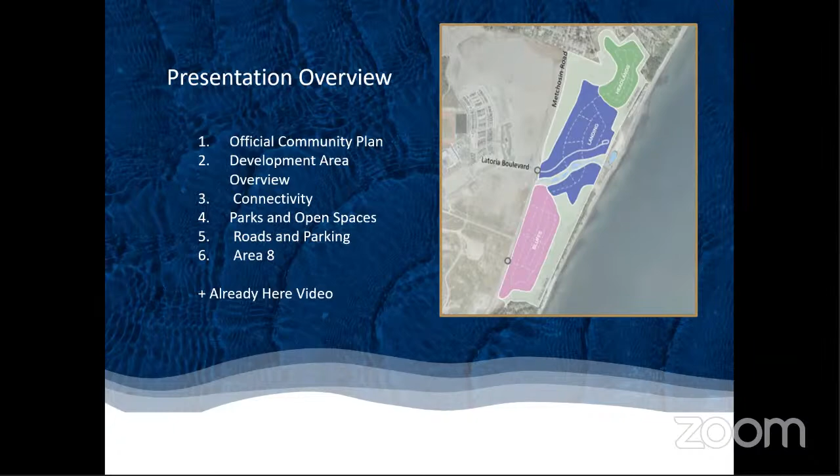Royal Beach has been identified as one of two primary centers in the city of Colwood designated for cultural, civic, economic, and public life. As you can see from this map from the Royal Bay Area Plan, the proposed development is not that different from what was envisioned, and some components like the amount of parks and open space and where they are located have remained largely unchanged.

This is the Royal Beach portion of the Royal Bay Area Plan. I've highlighted Latoria Boulevard and Ryder Hesjedal Way for orientation. Shortly, I'll provide a high-level overview of each development area and their purpose, as well as precedents for the uses and built form for each. A more detailed overview of each development area will take place at the time of public hearing.

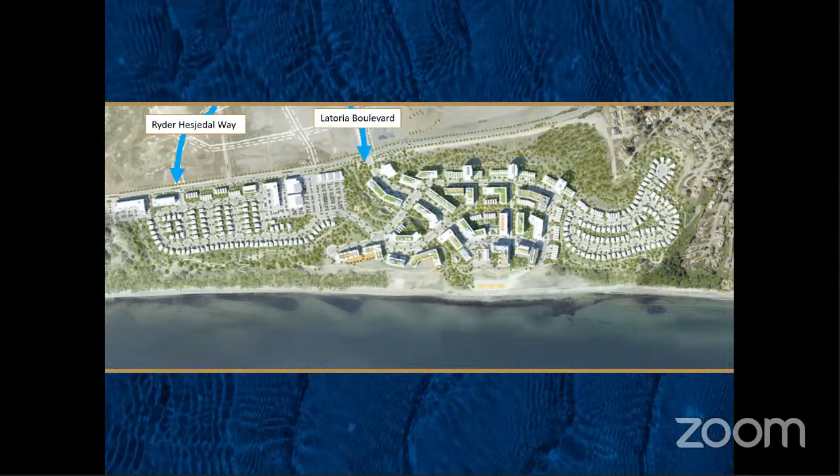The current OCP and land use amendments look to expand the Seaside Village land use designation and add additional density to the lands. The Seaside Village designation has been extended south along Metchosin Road to respond to the expansion of the designation at Latoria South and create the Metchosin Road corridor, as this is the only part of Royal Beach that can immediately respond to development across the street.

The Seaside Village designation has also been extended south in the Landing neighborhood to allow for greater flexibility in the future around land uses such as a future passenger ferry terminal. The proposal is substantially aligned with the Royal Bay Area Plan, which identified approximately 50 acres of parkland dedication, predominantly in the Bluffs and the Headlands neighborhoods.

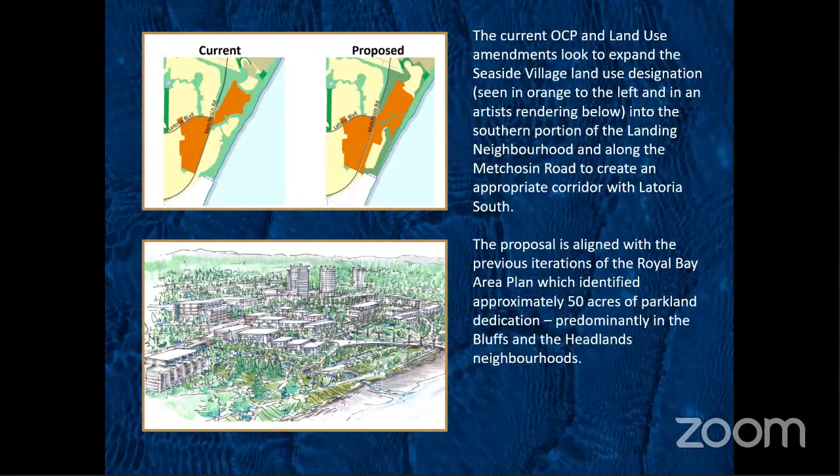This conceptual rendering shows what a built-out Royal Beach could look like under the proposed zoning amendment. For reference, the brown tent currently up at Royal Beach is just above the lowest pond. That pond is located on the far side of the volleyball courts on this rendering. This helps demonstrate the substantial space between the foreshore and the waterfront property line at Royal Beach.

At this time, I won't go through how the proposed landing design guidelines apply to each area, but I will note that they do apply to all the development areas in Royal Beach except for Area 3 and Area 7.

Each area will be highlighted in these next slides with the blue outline, as you can see in the top left of the rendering. Area 1, Bluffs, multifamily, and mixed use.

This area is where the Seaside Village designation has been expanded to create the Metchosin Road corridor and synergy between Latoria South and Royal Beach. Predominantly standalone multifamily buildings are planned, ideally with a mixed use component. This is also where the extension of Ryder Hesjedal Way will enter Royal Beach. Standalone non-residential is not planned for this development area.

Area 2, the Bluffs Commons. This area is where larger format retail uses can occur at Royal Beach. Areas 1 and 2 are the areas where there is a maximum of 6,600 square meters of non-residential uses permitted. Seacliff Properties has withdrawn the request to remove this maximum.

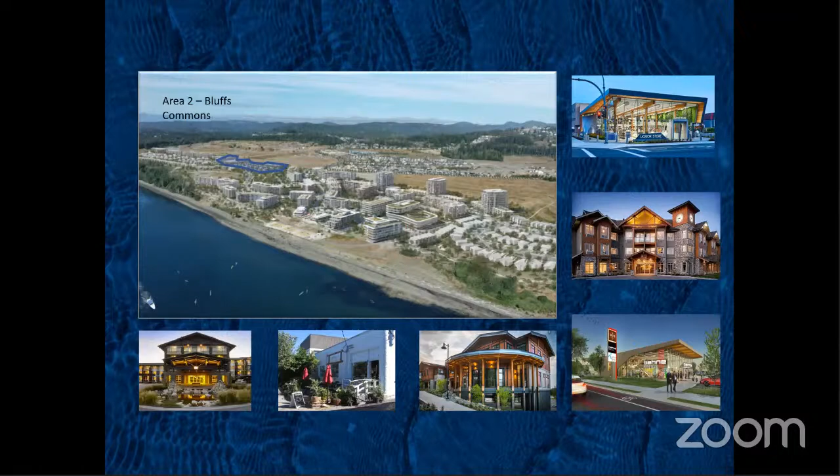Area 3, the Bluffs neighborhood residential. This area is predominantly 1 and 2 family homes, as well as some multifamily. A significant portion of this development area is proposed parkland. For information, there's about 95 linear meters between the high water mark of the Bluffs and the geotechnical build line in this area.

Area 4, the Shores at the Landing. This area is where mixed use and multifamily development is proposed along with non-residential uses. This is the development area where a future passenger ferry terminal could be developed, as the roughly 5-story grade change here could accommodate a larger building while having minimal impacts on the upland sightlines. No buildings taller than 6 stories can be developed in this area.

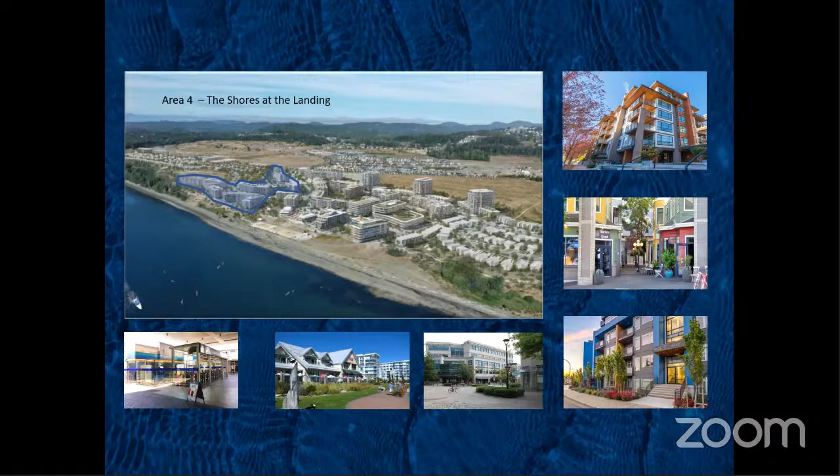Area 5, the Landing Mixed-Use Core. This area is where mixed-use development will occur, along with some standalone multifamily in the townhouse or apartment typology.

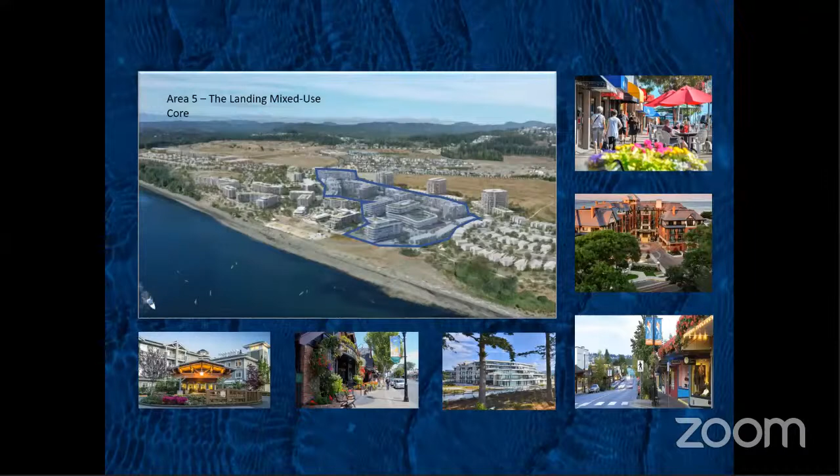Area 6, the Landing Mid-Rise. This area is where building heights can be up to 12 stories due to the siting along the base of the steep Metchosin Road hill. This will be a mixed-use area where the podium style of building could be featured. For context, only one of the 3 proposed 12-story buildings will be seen as about 3 stories from Metchosin Road. Another will look like a 1-story building, and one will be completely out of sight from Metchosin Road.

Area 7, the Headlands neighborhood. This neighborhood is a proposed single-family neighborhood with some transitional multifamily in the form of townhouses. This area will be where pedestrians could leave Royal Beach and travel north on the extension of the multi-use path towards Ocean Boulevard.

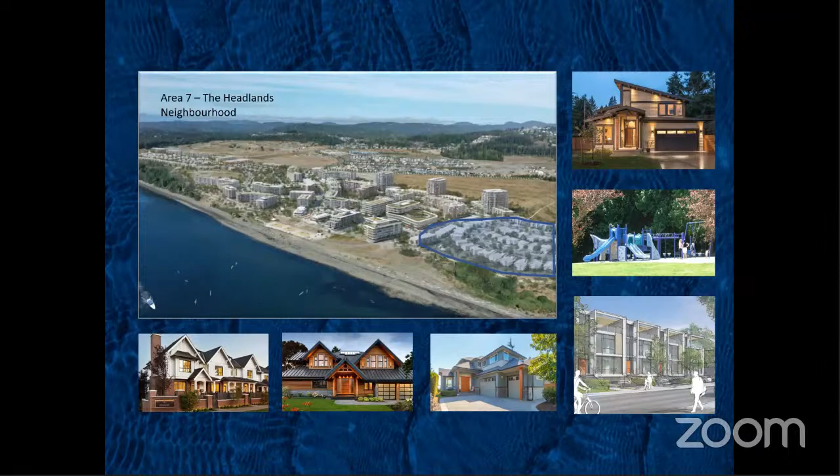Area 8, the Plaza at Royal Beach. This is the heart of Royal Beach, and this is the area in which all of Royal Bay and the Greater Victoria region will be connected to the waterfront and beach. I will be going through this area in detail later on in the presentation.

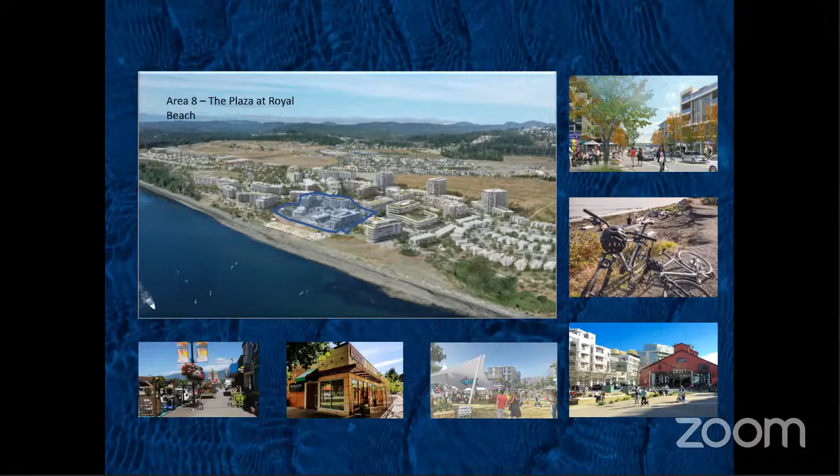So how are the development areas, parkland, and all of Royal Bay going to be connected at Royal Beach? Well, in a variety of ways. The first is most obvious: physically, at the entrance to the Creekside Trail at Metchosin Road, and the extensions of both Latoria Boulevard and Ryder Hesjedal Way into the site.

The second is visually. Royal Beach will look like the greater community of Royal Bay by using the same light standards, incorporating public art, the same style of street furnishings, boulevard treatments, and most importantly, with the views from public spaces, including Metchosin Road.

Finally, Royal Beach will be mentally and emotionally connected to the existing community. We understand that the residents of Colwood and beyond already have a strong attachment to the spectacular waterfront and naturalized areas at Royal Beach. We get that the lands are already part of the greater region and Royal Bay area, and want to emphasize and make that experience better by strengthening that sense of place.

This is the overall connectivity map showing the entire Royal Bay area of Colwood. On this map, Metchosin Road is detailed in purple, and so is the extension of Latoria Boulevard into Royal Beach. These are considered arterial roads. The other road connectivity point

is the extension of Ryder Hesjedal Way into Royal Beach as a collector road, shown in green. Royal Beach is also connected to Latoria South and lands to the north via two multi-use paths. One begins at the park space at the Metchosin Road Latoria Boulevard intersection and travels down Royal Beach, adjacent to the existing stormwater channel, to tie into the second multi-use path, which runs parallel to the waterfront for the majority of the Royal Beach foreshore. That waterfront multi-use pathway will connect over the city lands to the north towards Ocean Boulevard for future City of Colwood waterfront connectivity.

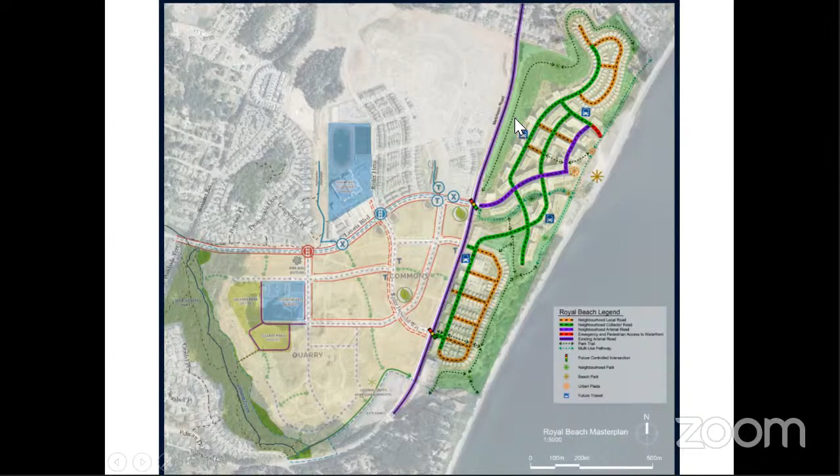The amount and quality of the parks and open spaces at Royal Beach is what makes us a vibrant, connected to nature and world-class community. The total parkland dedication is approximately 50 acres in area, designed with a softscape, naturalized approach for both parks and the trail network. The waterfront multi-use pathways will act as a main spine and connect people to lands beyond to the north and up into Royal Bay with the Creekside Trail.

The foreshore lease lots, identified as a city-initiated piece of land to rezone for future marine uses, is the perfect area for passive recreation such as volleyball and community gatherings. The parks at Royal Beach are plentiful with 10 special places that include a range of things from playgrounds to viewpoints, acting as the pearls on the trail network necklace.

Shouldn't write my own tongue twisters into my scripts.

Please note that the request for community amenity credit for the temporary park at Royal Beach was formally withdrawn on October 14th. Seacliff Properties Senior Asset Manager Georgia is on the line and can speak to that in more detail during agenda item 5.3.

We know that Royal Beach is already an important destination for folks to connect with nature, walk the beach, and recreate. The intention of the parks plan is to enhance the things that are already here and provide the supporting amenities to make Royal Beach a world-class community and destination for not only Greater Victoria, but all of Vancouver Island.

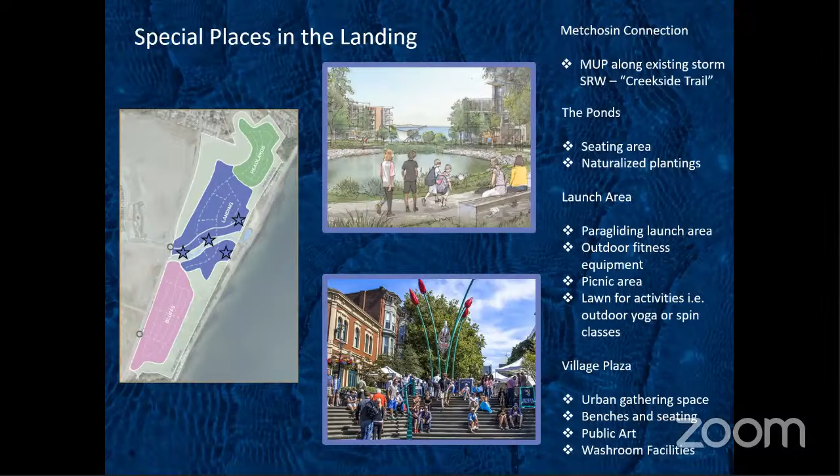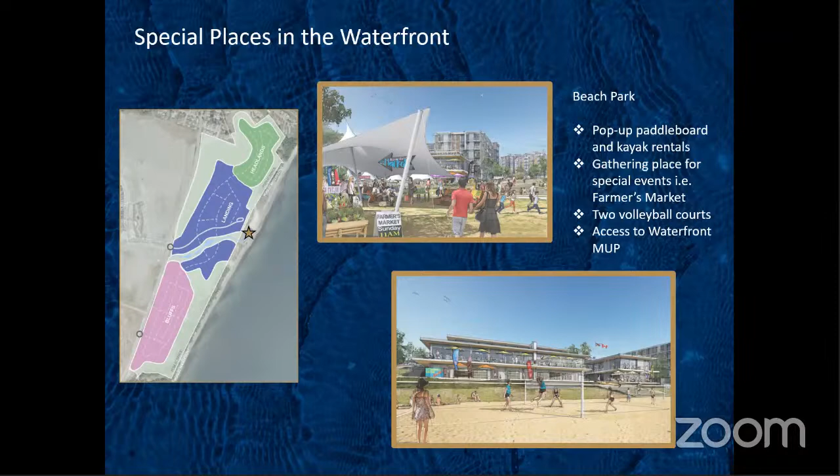In the Headlands, we see the last 2 special places, the Metchosin Bank Lookout, which will be a viewpoint with a seating area, and the Headlands Park, which will be a viewpoint, seating area, and have a small playground.

Note the ground floor of any building within 18 meters of the waterfront property line cannot have any office uses, to encourage an active and vibrant waterfront area.

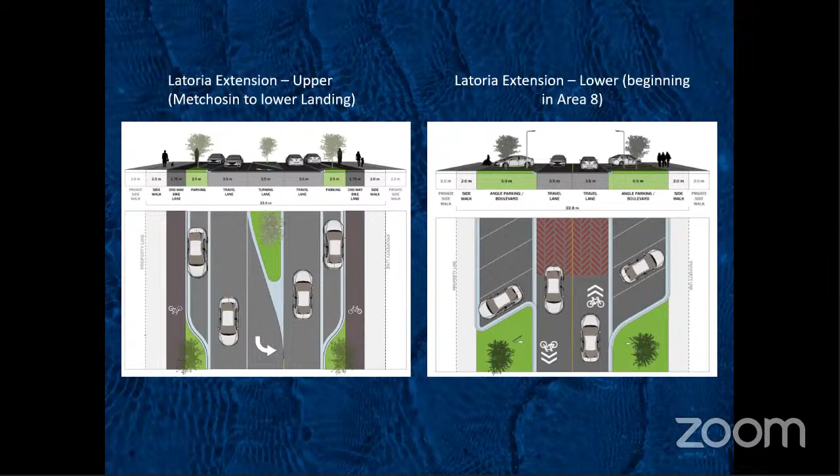The neighborhood local and collector roads echo those from Latoria South in design. All internal roads at Royal Beach will include on-street parking where achievable. For collector roads, one-way bike lanes will be provided on either side of the road. As Royal Beach is quite sloped, the grade will ultimately determine how each portion of road will need to be configured.

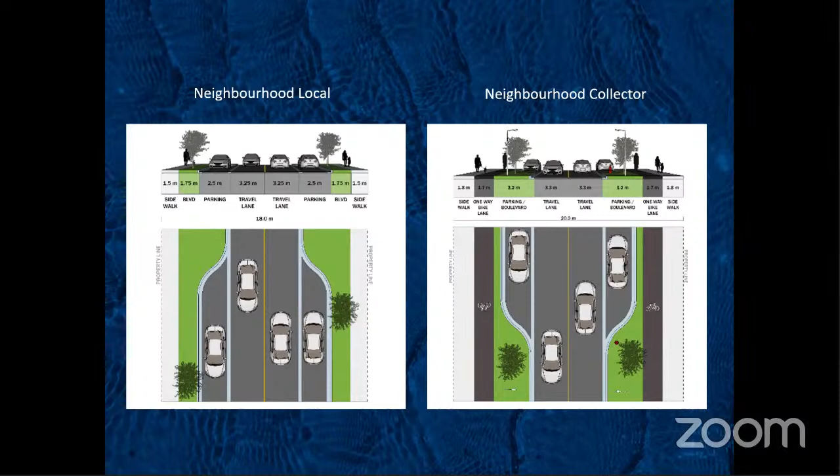Area 8 is now approximately 3 hectares in size, includes 4-meter wide sidewalks and angled parking on either side of the road, has 3 statutory right-of-ways to guarantee public access to the waterfront, and a limit on size for ground floor non-residential uses, excluding brew houses and eating and drinking establishments, because nobody wants a small pub.

This is also the area where no office uses are permitted within 18 meters of the waterfront property line. The foreshore length of Area 8 is 205 meters.

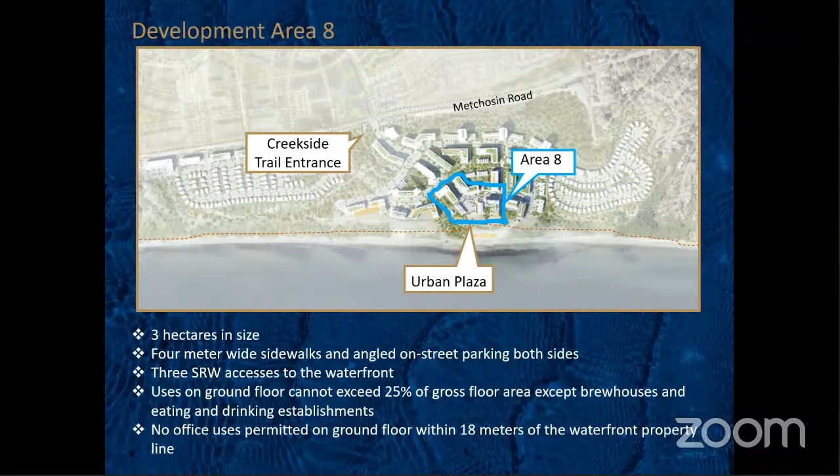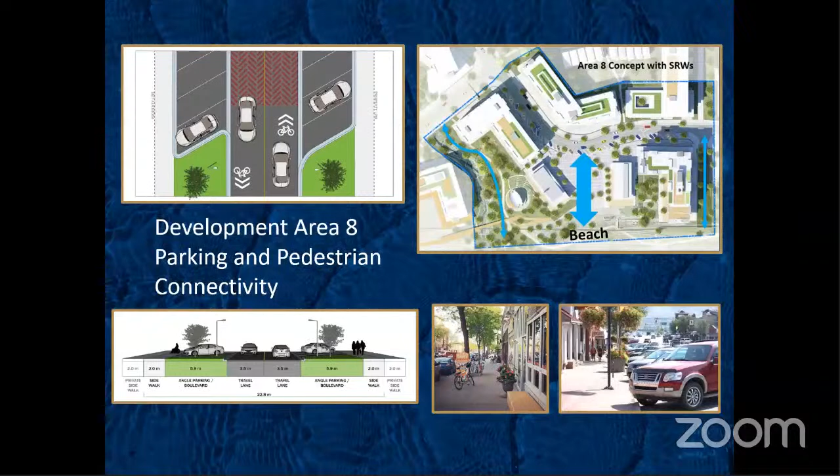This artist's rendering of the plaza and lower Latoria Boulevard demonstrates how all of these components may look and feel. The buildings step back from the waterfront, the boulevard is ample, a wide plaza frames the City of Victoria view, with the buildings directly adjacent spilling activity out into the public space.

Overall, the area has a human scale with a high quality urban design. This is planned to be a sticky place, the heart of the Landing neighborhood, and hopefully Royal Bay in general.

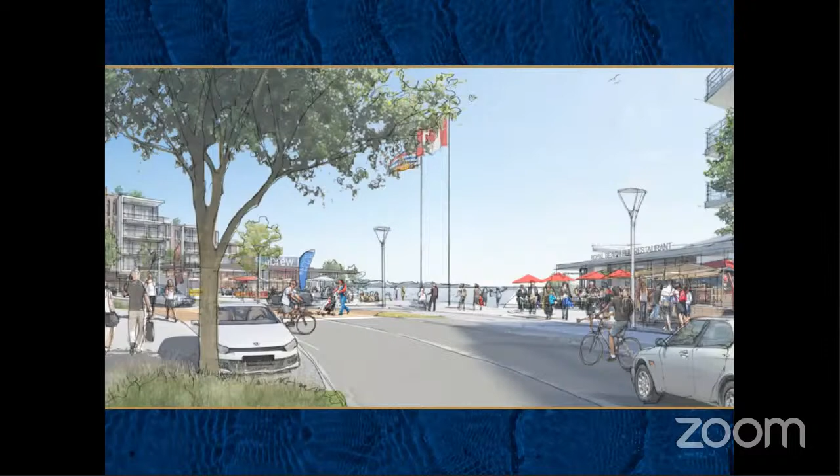That concludes our presentation. Thank you. Seacliff Properties and the development team look forward to the public hearing and working with the City of Colwood to make this world-class community a reality.

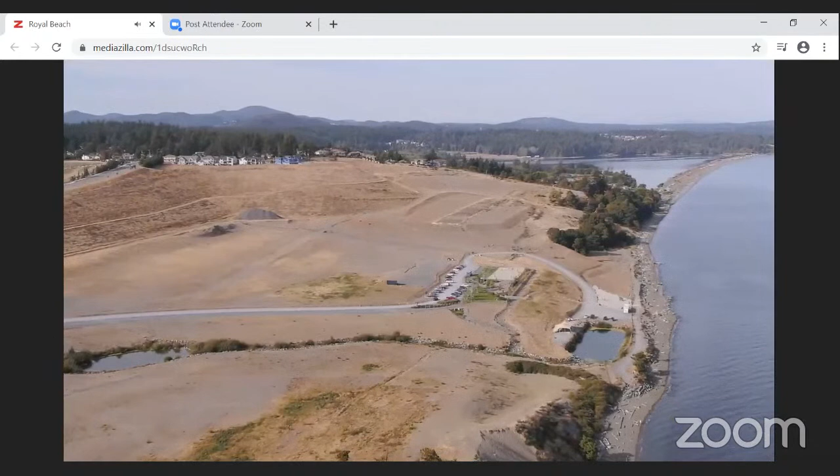Royal Beach. The community is already here. Royal Beach is already a destination for recreation, tourism, and community gathering. The new Seaside Village will offer even more amenities, parks, and open spaces, with the promise to be a vibrant, flourishing...

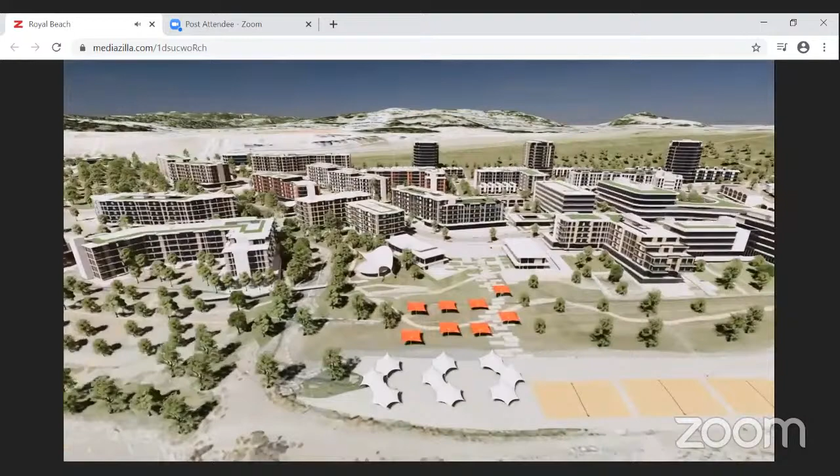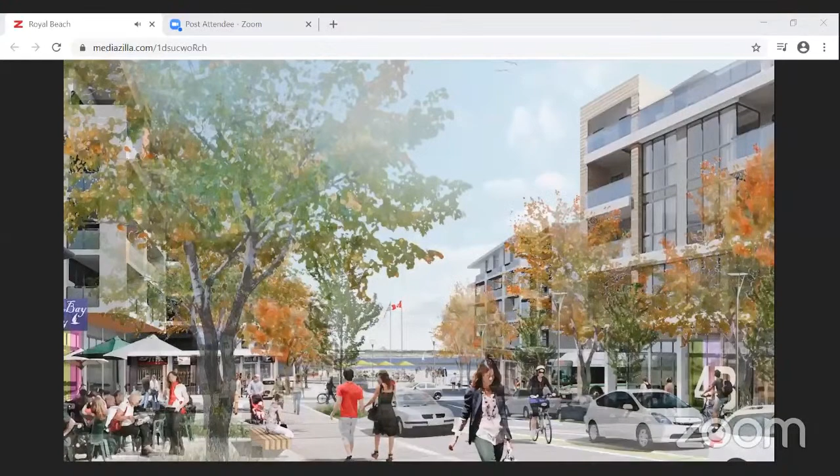Bike lanes and angled parking in the heart of the landing neighborhood. This road will take residents where they want to go. Trails will be another important point of connection to Royal Beach. The Creekside Trail will be a multi-use pathway, creating a wide open space that leads people down to the waterfront. Other trails will connect to 10 special places and parks sidewalks outlined in the Royal Beach Parks plan, but they'll also connect to other trails in Colwood, such as Ocean Boulevard and the Meadow Park Greenway.

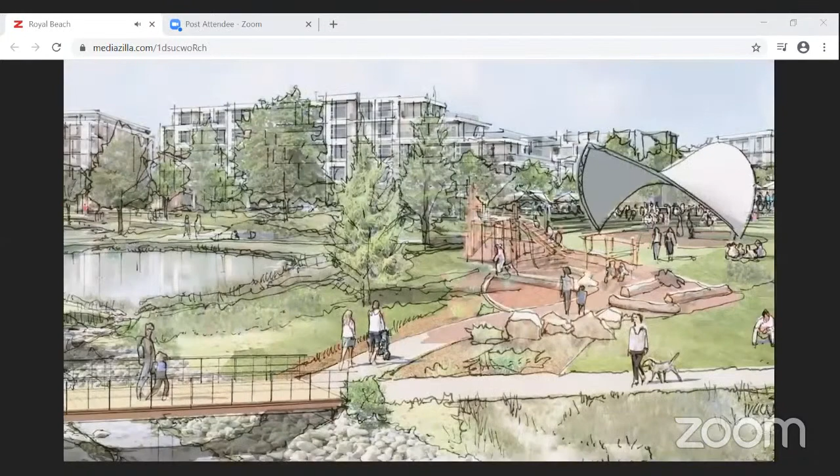When people arrive at Royal Beach, they'll find local shops, restaurants, parks, and residential spaces that are at the heart of Colwood. Area 8 and the landing neighborhood in general will be the hub of all of Royal Bay, stitching together the surrounding neighborhoods and connecting them to the waterfront and lands beyond, as envisioned in the Colwood official community plan. With its world-class waterfront and incredible public amenities, this area will also be a destination for the whole capital region and visitors to the island.

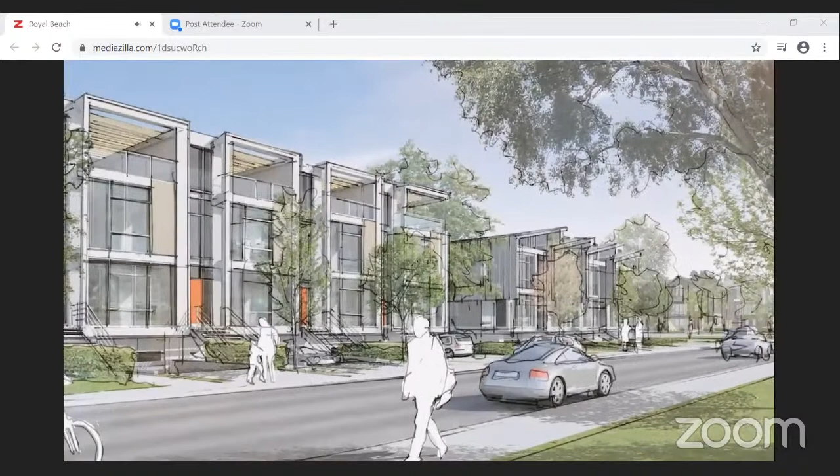Royal Beach's design will echo the surrounding community to make a strong visual connection. Light posts and boulevard planting currently seen in Royal Bay will be continued down into Royal Beach. The Headlands neighborhood is designed to blend well with the existing single-family development to the north. And finally, the mixed-use commercial space at the top of the Bluffs will create cohesion on Metchosin Road and integrate well with the commercial area across the way in Latoria South.

So how do we know that Royal Beach will become a community, citywide, and regional destination? Because it already is. This summer, Royal Beach hosted a wide variety of events and welcomed visitors, vendors, and participants from all over the Lower Island. More than 4,000 people visited Royal Beach this summer for scheduled events and pop-ups, in addition to the countless community members who frequent the area for its playground and the waterfront.

The events highlighted how the Royal Beach development will enhance this already important spot in our community and provide valuable connections. The Sunset Markets, for example, brought vendors from Metchosin, Victoria, and even Saanich and offered insight into future commercial opportunities along the High Street, Area 8, and throughout Royal Beach.

Spinco by the Sea provided an opportunity for a local business to welcome riders from all corners of Greater Victoria and the West Shore. And it's easy to imagine this kind of activity in a permanent structure as the development takes shape.

Paddle sports pop-ups connected people directly to the water. It's clear that Royal Beach will be a destination defined by its oceanfront location, and water rentals will continue as the new community develops.

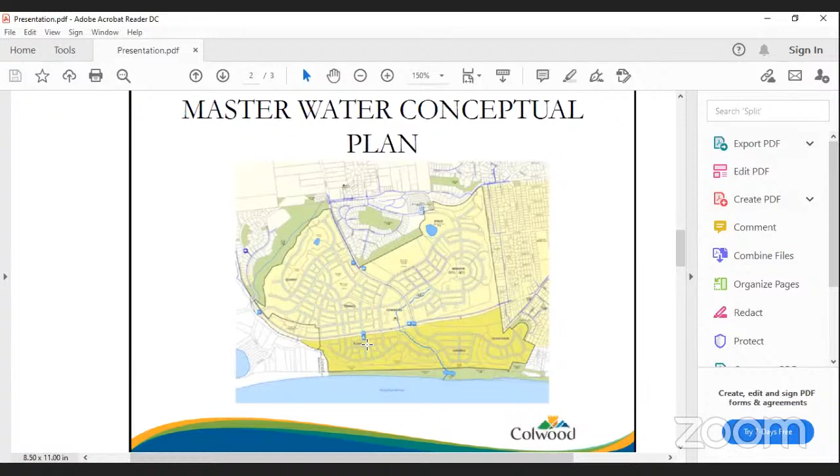With the higher density, On Point has calculated that there is adequate water supply and water pressures to service this development through 2 pressure reducing valve stations. If the development needs additional water supply, they will be able to connect directly into the supply main on Metchosin Road. At each stage of the development, we will be making sure that there is adequate domestic flows and fire protection flows for each stage.

For sanitary sewer servicing, all of the servicing is expected to be by gravity flow to 1 lift station at the low point of the development. There were some questions about whether it might make sense to abandon the large lift station on Metchosin Road and combine it with this lift station for 1 large lift station.

On Point did some very high level comparison of operating costs to do this, and they found that it would take a lot more electricity to run just 1 large lift station at the lower point rather than having 2 separate lift stations. They also did not take into account the fact that there is an existing smaller lift station on Metchosin Road. So if the large lift station is relocated into Royal Beach, the smaller lift station would have to be upgraded as well, all the way up to Latoria Boulevard.

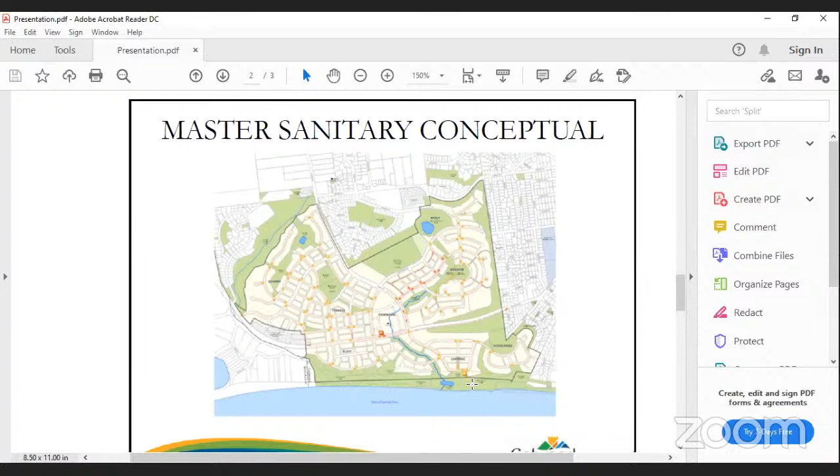The Royal Beach area was calculated to have an allocation of 21.2 liters per second for sewage flows. On Point has calculated that the maximum sewage flow due to increased density may be up to around 65 liters per second. So the developer will need to measure the flows at each stage in development, and when they do exceed the 21.2 liters per second allocation, they will have to start paying enhancement fees.

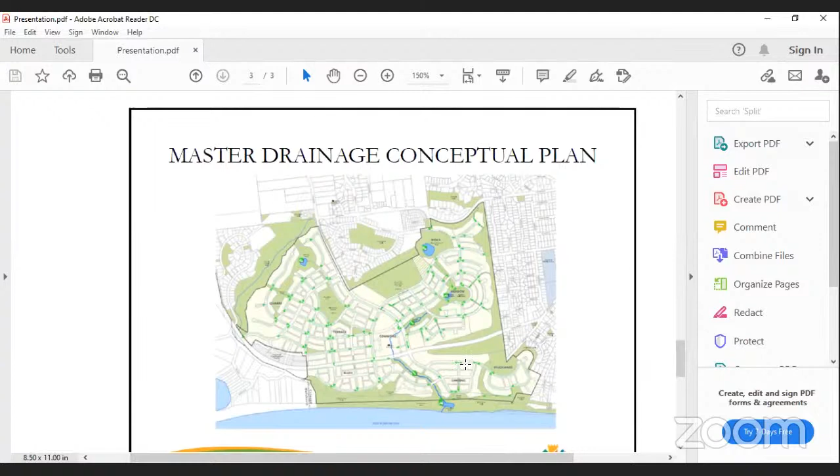I don't have slides, but for BC Hydro, they don't have quite the electrical capacity needed for this development, so the developer will have to work with them to ensure there is enough. For telecommunications and Fortis BC, those utilities have confirmed that they have adequate capacity to service the Royal Beach development. So the recommendation is that this report titled Royal Beach Servicing be received.

Are there any questions? Thank you very much. I think I have a couple of hands up. Probably what I'd like to do is just give everybody a chance to comment on each of these reports in turn, and then after everybody's had one chance, I'll look for a motion or a recommendation. As I said, we have Helen and others here ready to answer any questions.

So if I could start with Mayor Martin. Thank you, Chair. I have to ask the question because it just needs to be asked, and I just need to hear the answer just once. We are confident where we are placing the lift station that the 100-year, whatever it is, that we will not need to move that lift station.

I do not want to be in a similar situation to what we are at the bottom of Ocean Boulevard with the lift station there. So do we have complete confidence that that is the right place to be putting that lift station, and it shouldn't cause any issues where it would need to be moved.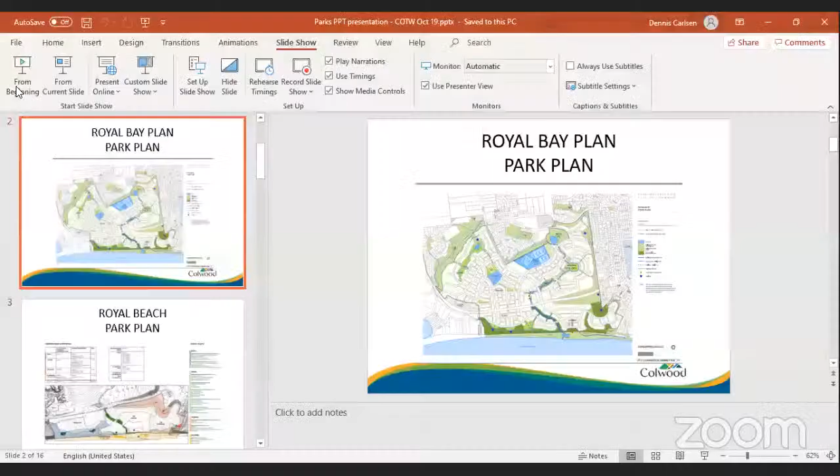So this presentation is regarding the parks terms of reference. Some of the things I'll mention here have already been covered by the applicant, so I'll attempt to be brief. This Parks Terms of Reference came out of a council resolution on February 24th that instructed that, as part of the development agreement, we, together with the applicant, develop a terms of reference to be presented for your consideration and a recommendation onto council.

It also included a recommendation that the first phase of development would include the waterfront park and open space in the landing, and that it would also include public parking as well as a surface trail system parallel to the waterfront.

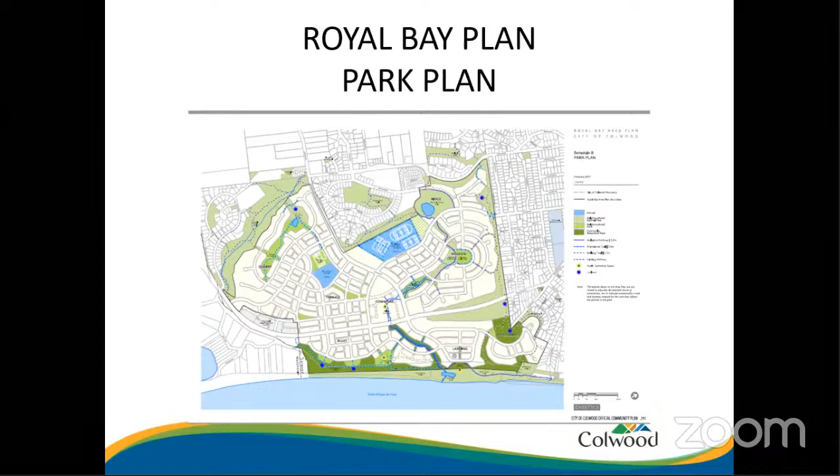Just for context, the Royal Bay plan, which is in the OCP, did establish a parks plan, which, if it looks familiar, is very much reflected by the parks plan being proposed by the applicant. In the opinion of staff, this parks concept is in keeping with that overall Royal Bay Parks plan. As has been noted, the foreshore is not part of the subject property. It is Crown land, partly held as a foreshore lease held by Seacliff Properties.

For some additional context, which I think was presented to committee or council a few weeks ago, the draft Colwood Parks Plan identified that the current inventory of parks in Colwood was approximately 1.2 hectares per thousand. As a point of comparison, what the applicant is proposing is significantly more than that, at about 2.7 hectares per thousand - again, comparing municipal parkland, which includes everything: neighborhood parks, parkettes, everything. The current inventory is about 5.3 hectares per thousand, and the proposal for Royal Beach is about 3.1.

Moving on, and Aaron will talk about this, the road standards, more in his presentation. But basically, what I want to do here is indicate that in addition to the parks plan and the trail network that connects all these, there's also additional pathways that will form part of the road network. So there will be multiple connections between the various areas in the site and also to areas outside of the site.

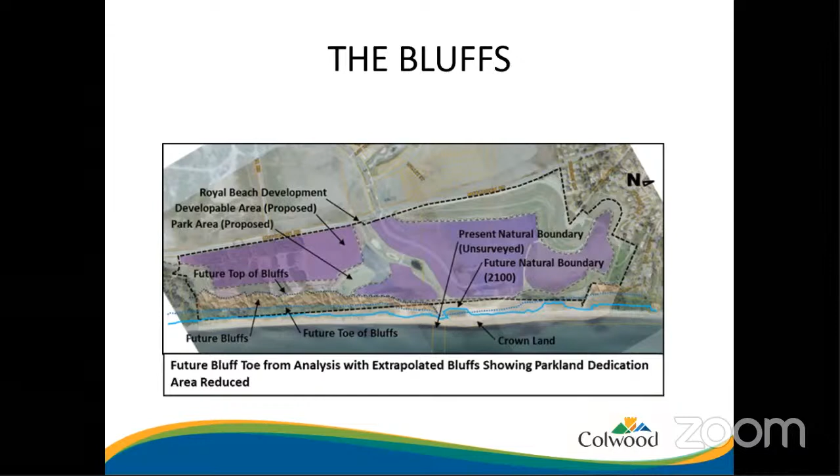Now, in discussions with the applicant and in response to council's concern about taking this on as parkland and what that means in terms of risk and liability, the geotech report that also accompanied the report in December did show, as a way of holding back the contamination, that there would be a wall constructed, which you can see on this diagram, essentially in this area here. And in discussions with the applicant, we have suggested that as a condition of the development agreement, there will be no subdivision within Area 3, which is essentially this whole area in behind the structure, until the works have been identified and constructed. So we're hoping that that will provide council some assurances that these issues will be dealt with to their satisfaction.

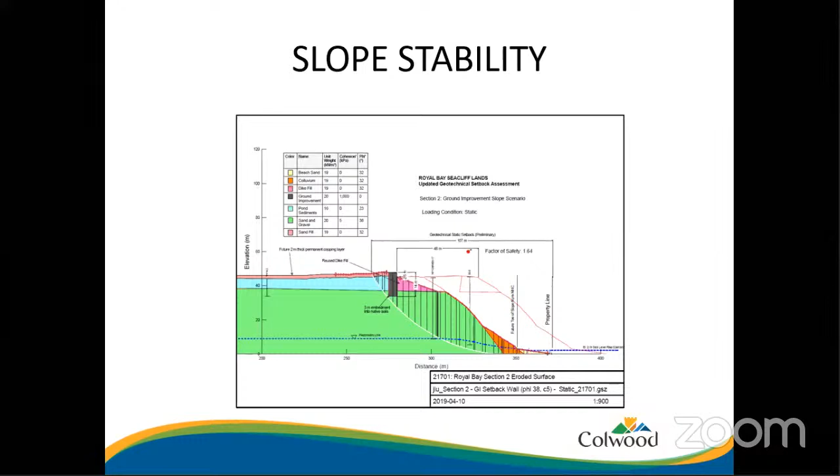Turning to the landing, there also are some things that staff want to point out here, largely in response to concerns expressed by council about wanting to have a better idea of what was proposed down there. This is similar to the image that you saw in the presentation at the beginning from Tanisha. But this image, along with accompanying text, will be included in the sub-area plan, and its intention is to make it much clearer where the views and the access and the open space will be provided adjacent to the water.

As you can see here, there will be a large plaza for the public. There will be a pathway that will work its way down the improved storm channel area, and an additional connection from the street through to the water. So multiple points of connecting through a variety of ways, as well as the water, all of which is the intention of connecting to the waterfront pathway. You will also see when Aaron provides his report that the street will provide angled parking to provide hopefully sufficient public parking for access for people wanting to take advantage of the waterfront pathway.

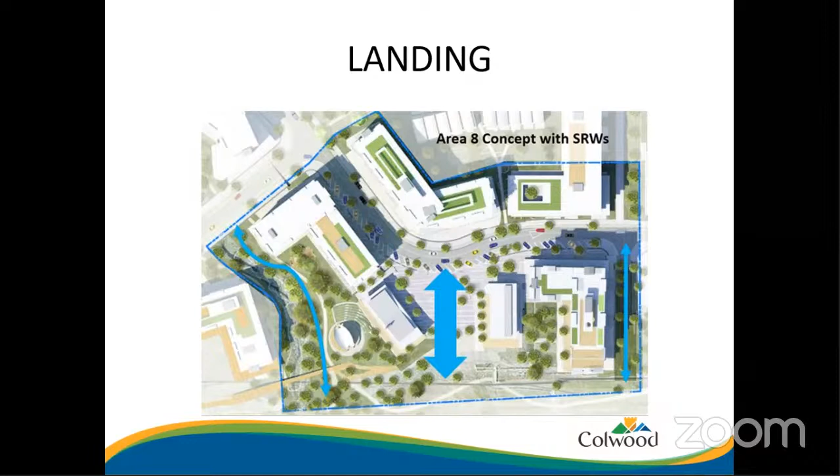In terms of the waterfront itself, the foreshore has been mentioned in discussions. Council at its meeting of August 31st directed staff to prepare a bylaw to amend the zoning on the foreshore leases, which are currently zoned A1, basically a rural residential zone, with the intention that we would include zones that would allow the applicant to animate the foreshore with various types of uses, be these structures or activities.

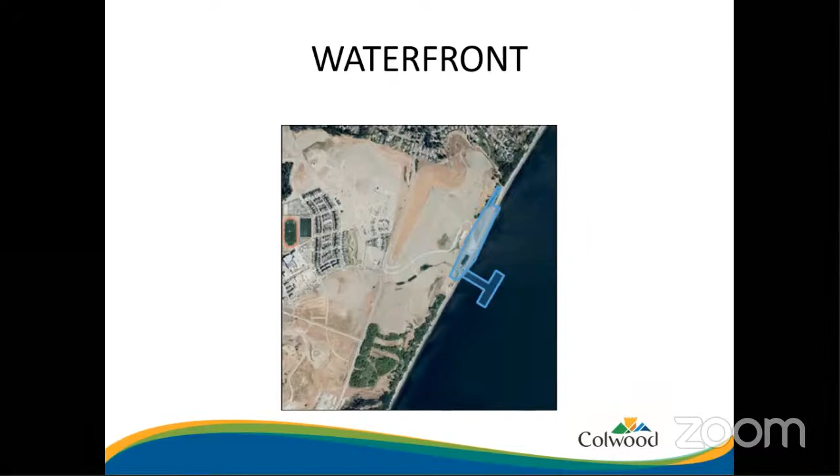Moving to the headlands, again, one of the issues we heard from council is the ability in the future to connect through from Royal Beach around the properties at the end of Ocean Boulevard, and then allow people to be able to make that connection through to Ocean Boulevard. We are in the process of discussions with the applicant about how we can work collectively on this. We recognize that there are some grade challenges, but part of what will be included as a development agreement is undertakings yet to be defined in detail how and who will be responsible for essentially making this connection.

I should point out that this shaded area here is currently owned by the city, and the Ocean Boulevard right-of-way extends right to the end here. There are two houses that are located here, so part of what will require further work is how, in the best way possible, to make the extension connecting through here around those houses and then to Ocean Boulevard.

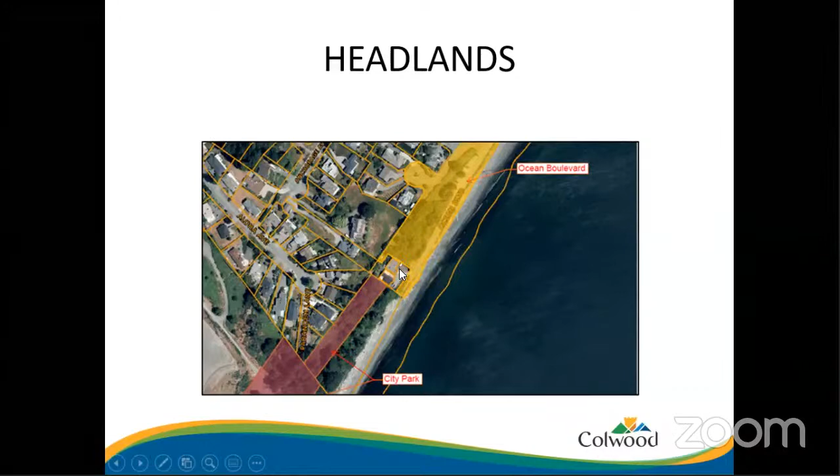Lastly, in terms of the park's terms of reference, which are attached to your report, these are intended to guide the development of the parks plan, which when developed will be brought back to Committee of the Whole for consideration and recommendation to council. It will include the estimate of levels of service for the various park areas, measures regarding slope stability particularly in the bluffs, more details regarding the waterfront pathway, and as usual, incorporating user-friendly trail standards, recognizing there are some grade challenges along here.

The staff recommendation is that we will include in the development agreement that the works to retain sediment in the bluffs be included prior to any subdivision and amenities in Area 3. The other point is regarding the amenity funds, which the applicant made reference to. They have withdrawn their request that the historical costs related to the temporary road and temporary park be withdrawn, but they are asking for the same consideration as Latoria South, that in future amenity fund contributions potentially be allocated towards specific projects within the lands. That concludes the staff presentation.

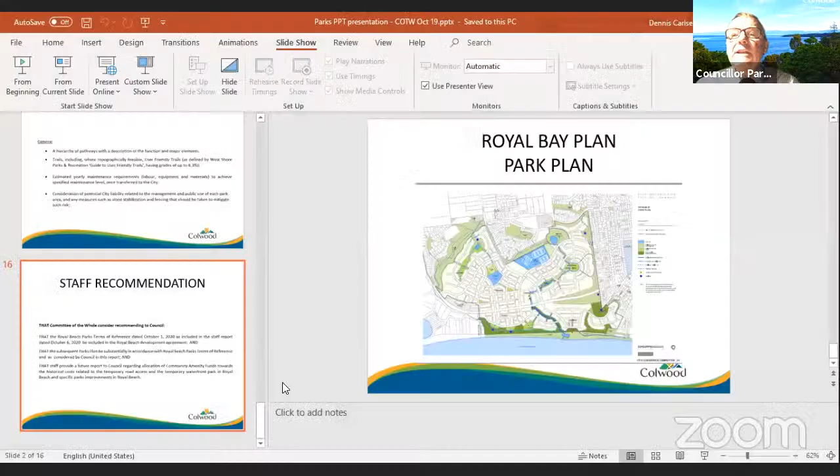Thank you, Mr. Carlsen. Once again, I'd like to give everybody a chance for discussion and input, and then we'll take the recommendation and move forward from there. Starting with Councillor Baxter.

This is a question directed through the chair to Mr. Carlsen. On the slide labeled Headlands, which shows the red area and the yellow area, behind the two duplexes close to the water there is a green area. Do you know the ownership of that green area? No, I don't.

Because I think that's a possible route for an all-weather waterfront route, since even now in high water it's not possible to walk past or beyond the duplexes if you leave from the pump station, simply because the water is too high. So an all-weather route might be possible back there if we can confirm the ownership. I have another question about the route from the park on the Bluffs down towards the waterfront. At point of interest number 2, I guess it is, there's a pathway that leads off in a northeasterly direction, then goes due south, then turns due east. Is that going to need stairs, or are we able to get a bike path through there, or do we know that yet?

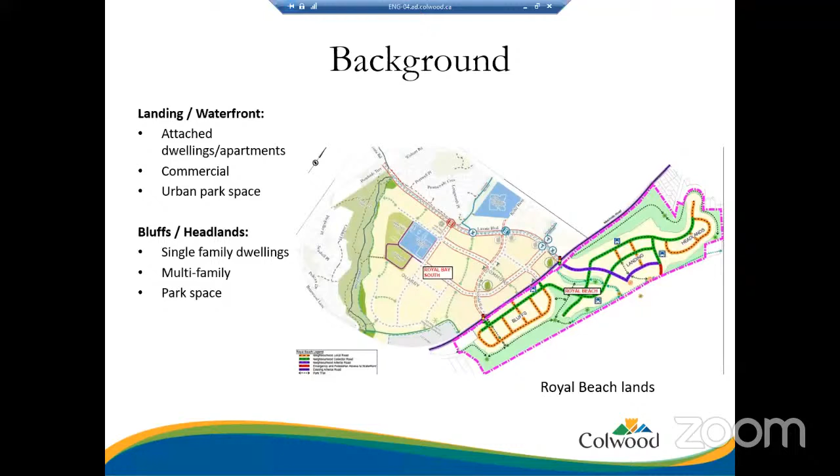Moving on, here we have the recommendations, taken from the report which you should all have at your hands. I'm not going to go into great detail on these right now, but if anybody has questions about the recommendations shown here, we can always go back to this or discuss it later.

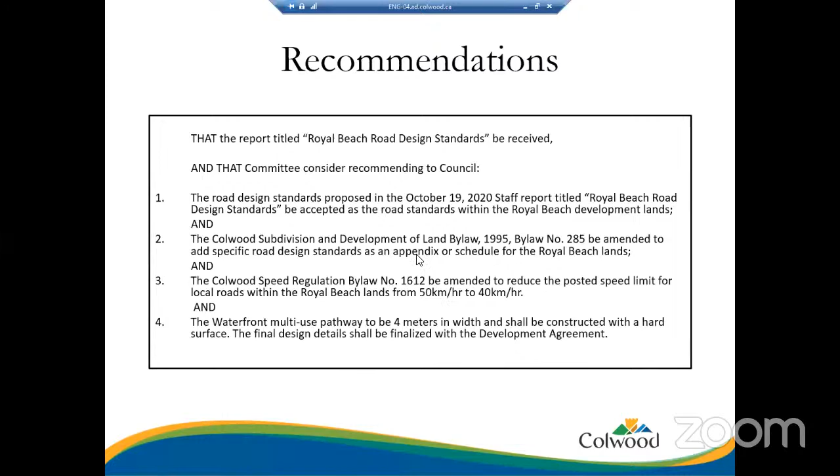So now I'll move on to a little bit more of the details here, starting with the neighborhood local roads. You can see on the map here, the local roads are shown in orange, which would be mostly where the single family dwellings would exist.

The green is all the minor collector roads, so a little bit more traffic flow on those roads, fronting some of the higher density and connecting up to the central spine arterial roads. The purple is the minor collector for the upper and lower Latoria extension, as well as the lower landing street in the waterfront area.

And then the multi-use pathways are shown in these dotted light green lines and darker green dotted lines. So the multi-use are the lighter green along these areas here, and then these would be your neighborhood connector pathways.

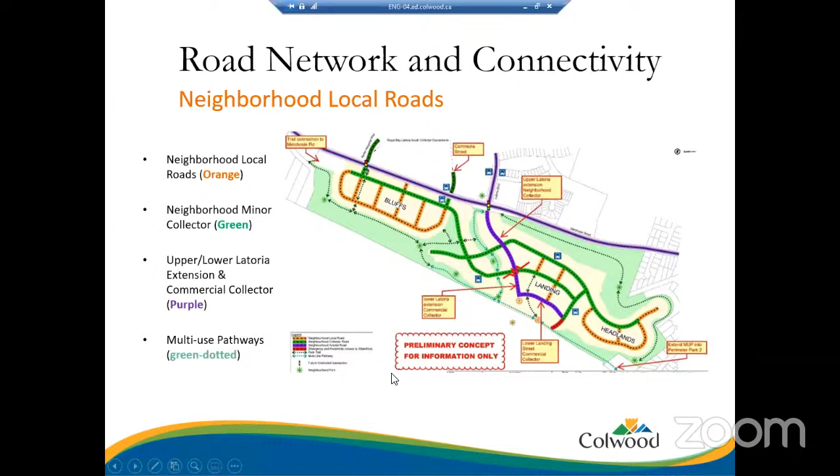Moving on, we have table 1 here, also taken straight from the report. It basically compares the works required by our current bylaw versus the works proposed by the developer. I'm not going to go into great detail on this slide, as I'd like to save my time for discussing the cross sections in greater detail. But we can definitely come back to this slide if anyone has questions later on.

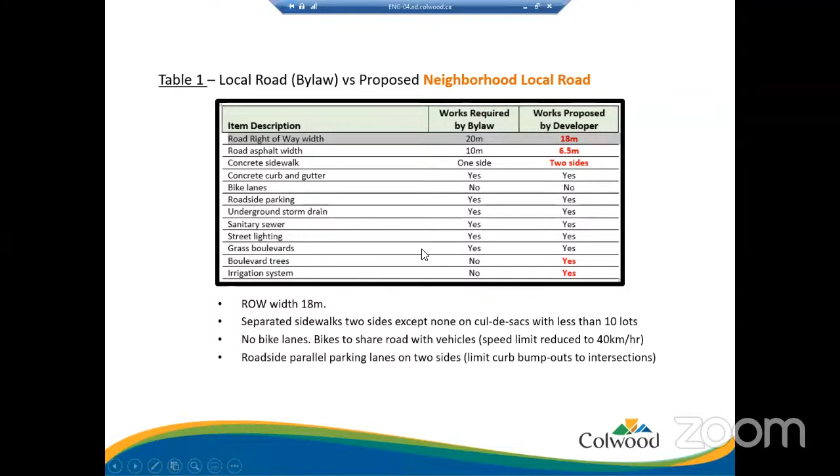Here we go into the local road sections taken from the bylaw, as well as the proposed section. Again, I'm not going to go into great detail on this slide, as we really want to move on to the next slide to discuss - oops, sorry, went a little too fast there.

We really want to discuss the proposed cross-section compared to our most current standard, which is taken from the Transportation Master Plan.

So in just comparing the two, the right-of-way width is a little bit different - 20 meters is typical, and here we're asking for 18 meters. The 2 travel lanes are exactly the same, 3.25 meters in both. We've got roadside parking, and in the TMP cross-section you can see a 2.5 meter buffer.

This was intended to be basically alternating parking scallops with boulevard landscaped areas. So that's what's shown here - we've got the 2.5 meter parking, and you can sort of see a little bump out peeking out behind the car here. That's the alternating parking bays that we're going for.

And then we have the separated sidewalks. A little bit of difference here - 2 meters are shown in the Transportation Master Plan, whereas we're proposing 1.5 meters on both sides in the proposed section. You'll also notice there's no bike lanes. It's following the intent of the Transportation Master Plan for local roads in neighborhoods, which is shared surfaces, trying to keep the speeds down, which ties into the speed limit reduction we're going to be talking about just a little bit later.

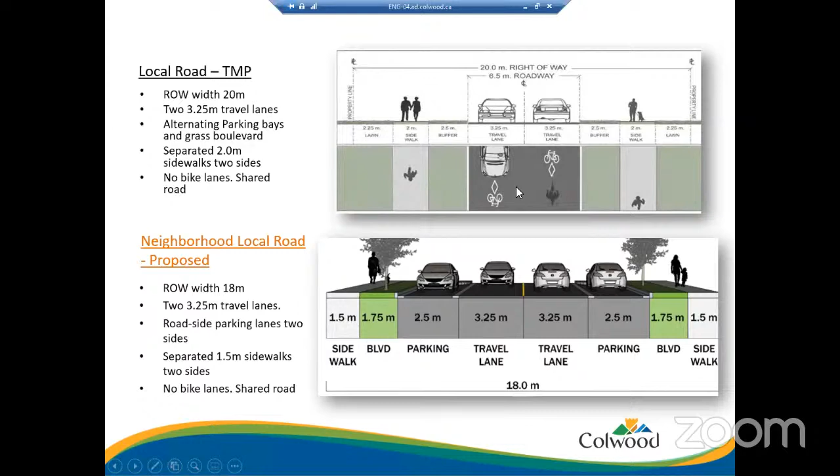Okay, moving on. We're on to the neighborhood minor collectors. Again, they are shown in green on here, and those orange roads again were the local roads.

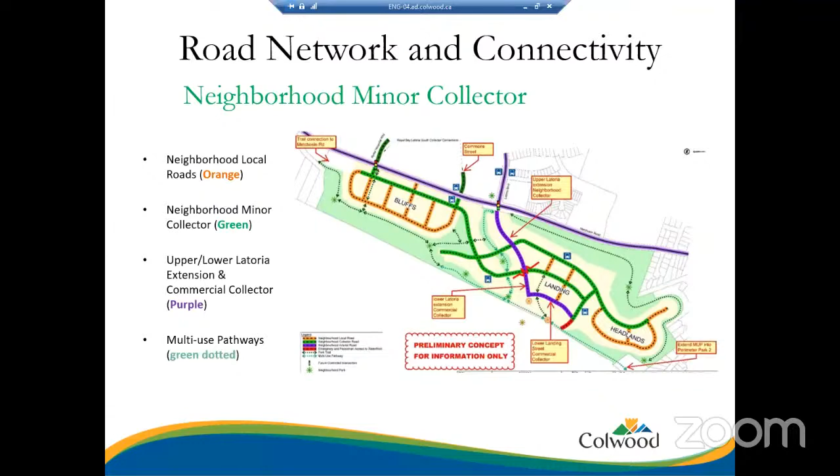So again, we'll move on here and show table 2, which compares the works required by the bylaw to the proposed works for the minor collector roads. I'm going to move past this slide pretty quickly so we can concentrate on the cross sections.

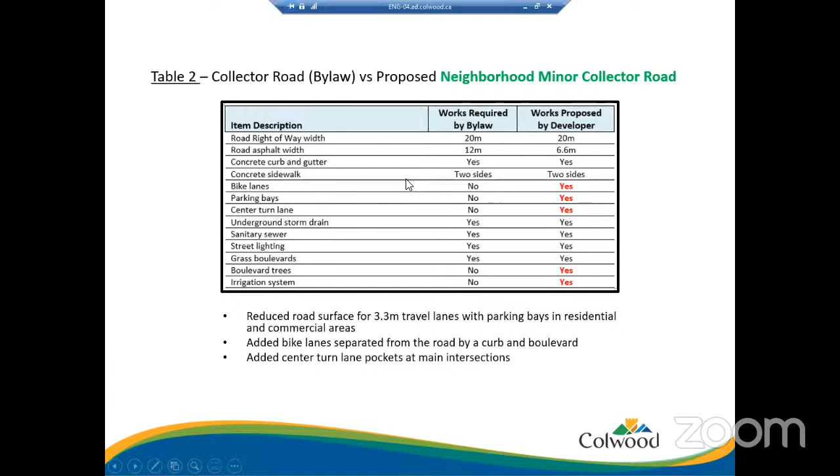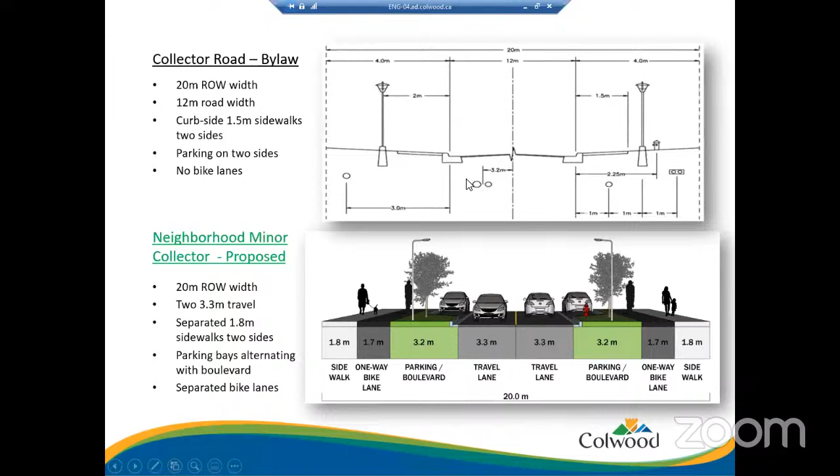Here is the cross section for the collector road from the bylaw compared to the proposed minor collector cross section. I'm going to move past this to get to our most current standard, taken from the Transportation Master Plan.

Really the differences here right off the bat are the locations of the bike lanes. The Transportation Master Plan calls for buffered bike lanes roadside, whereas in this case, we're proposing the bike lanes be separated by the boulevard, just for added protection, as well as to avoid conflict with the parking bays.

We're going to try and maximize parking as much as we can in the commercial areas as well as residential areas. So we really want to avoid having the bike lanes end or be in conflict with parking. We thought the best way to resolve that was to have them adjacent to the sidewalks and away from traffic.

Otherwise, the sections are fairly similar. Sidewalks on both sides, a slight reduction in the sidewalk on the proposed at 1.8 versus 2 meters on the TMP.

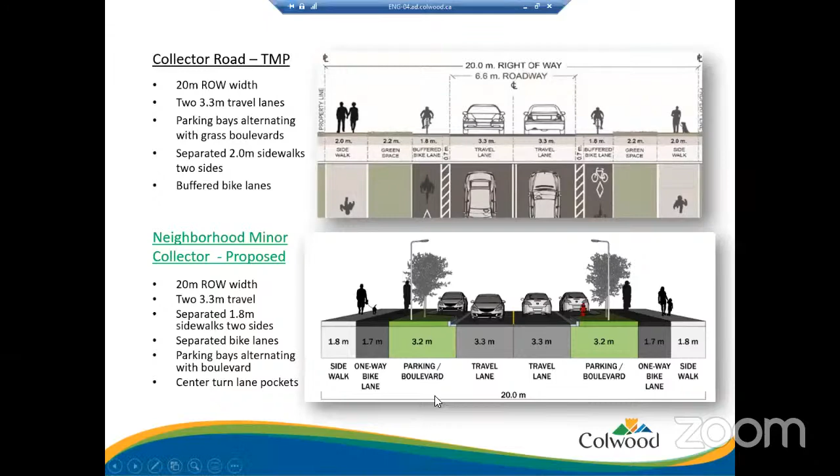Also, we are anticipating center turn lane pockets just to keep the vehicle flow without interruption. So we're going to add some medians with a little bit of plantings, some trees potentially. And that pretty much wraps up that.

Next, we move on to the Upper Latoria Neighborhood Minor Collector. That is this portion here, if everyone can see my mouse, basically from this breakpoint right here up to Metchosin Road.

And a little bit different standard is being applied here because we're looking at flow of traffic, connection to the collectors, as well as feeding into the arterials, Metchosin Road and Latoria Boulevard.

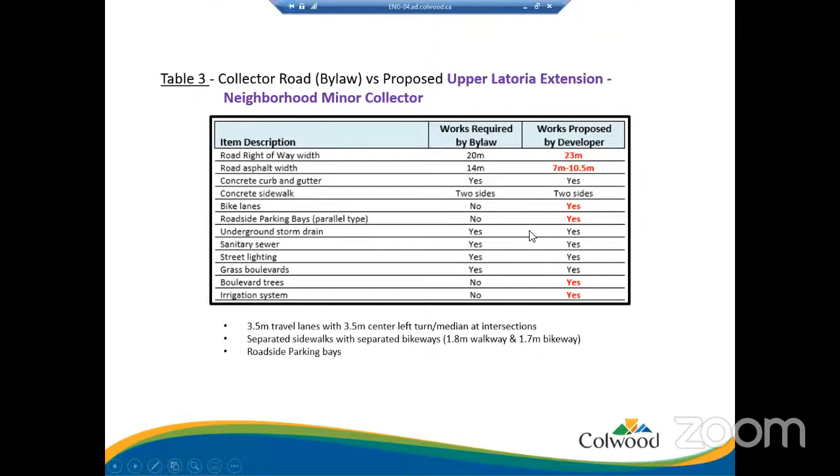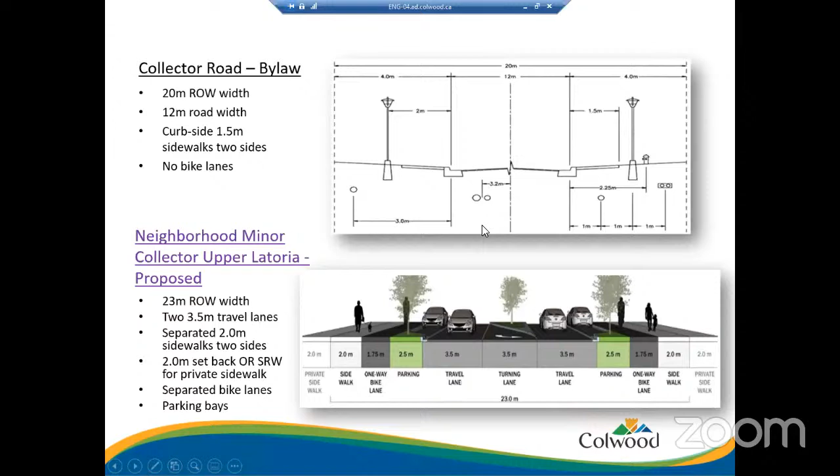So again, we move on to the table here, which compares the works bylaw versus the proposed works. And moving on, here's the section from the bylaw compared to the section that they're proposing. We're going to flip past that and move right to the TMP again.

The other key element to look at here is the introduction of these private sidewalks. Now, those are going to be captured by way of either a statutory right-of-way or through a building setback, to enable storefront furniture, signs, tables, what have you, maybe pedestrians socializing, while still allowing a pedestrian corridor to pass through. So we'll basically have a 4 meter wide pedestrian way through there.

I guess to get all of that, the parking bays, the center turn lane, the separated bike lanes, we've had to bump up the right of way to 23 meters from the typical 20 meters.

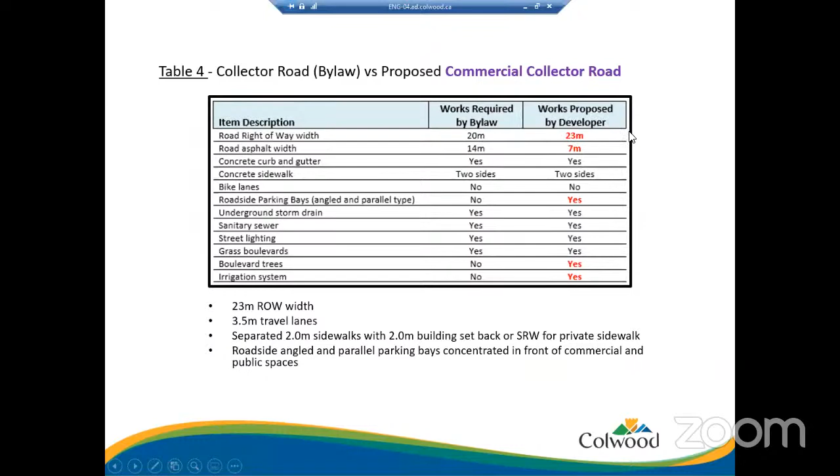So table 4 here again compares the bylaw works to the proposed works. Here I'm just going straight to the TMP to compare the proposed section. Now here we have quite a different cross section to consider.

Main reasons are for what I just stated: we want to try and maximize parking abilities, we want a pedestrian friendly zone, slower moving traffic, that sort of stuff. So as you can see from the proposed section, we're actually introducing angled parking. The angled parking will mostly be concentrated in front of the commercial areas and public spaces.

And then where road grades are a little bit trickier, we'll probably move back into a parallel parking design. Again, we have the 2-meter sidewalk with a 2-meter private sidewalk, so we get that 4-meter pedestrian corridor with a little bit of room for some signage and tables and that sort of stuff.

We aren't proposing bike lanes through this section, as was alluded to in the previous presentations, largely because we're looking again to reduce these speeds through this zone, a little bit more user, pedestrian friendly. We're going to have the multi-use pathway that I'll touch on a little later, that's going to run along the waterfront, which we think will have bicycles on it.

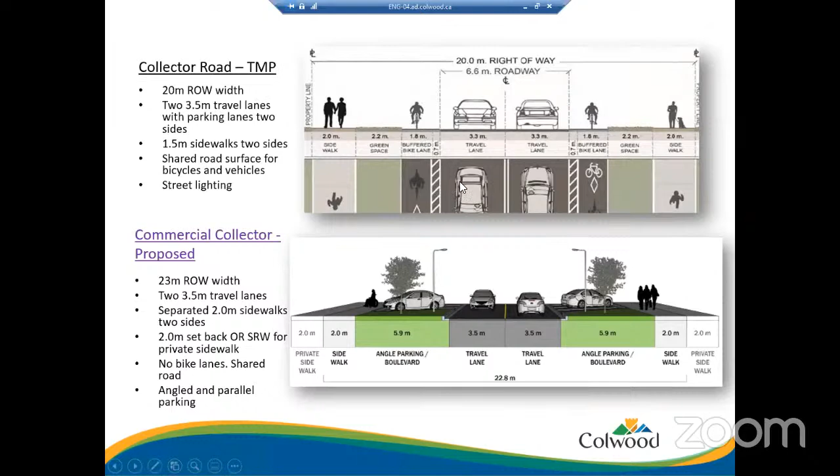Moving on from there, we lead right into the multi-use pathways. We've talked quite a bit about that in the previous presentations, but I'll go over it briefly again. We have what we're calling the connector multi-use pathway, which is going to connect up from Metchosin Road and connect up with the separated bike lanes on Latoria Boulevard and run through the linear drainage channel park, which would have more of a natural feel. It could possibly be a granular surface, possibly 3 meters wide, providing that family sort of feel, going out with your kids and your bikes, that sort of thing. So not necessarily a commuter way, but more of a...

And then we move on to the waterfront multi-use pathway. That is intended to connect up to the pathways on either side of the development, as we talked about on Ocean Boulevard. Hopefully we can get that connection made through the parklands, either in front of or behind those houses. And then we're hoping to get it to come through all the way to this area here in the Bluffs. There's probably going to be a transition from that waterfront look and feel to more of a neighborhood pathway trail, and that's largely based on the parklands that we want to preserve, as well as grades. Some grade challenges may exist in that area, but we just don't know that for sure yet. That information hasn't been fleshed out.

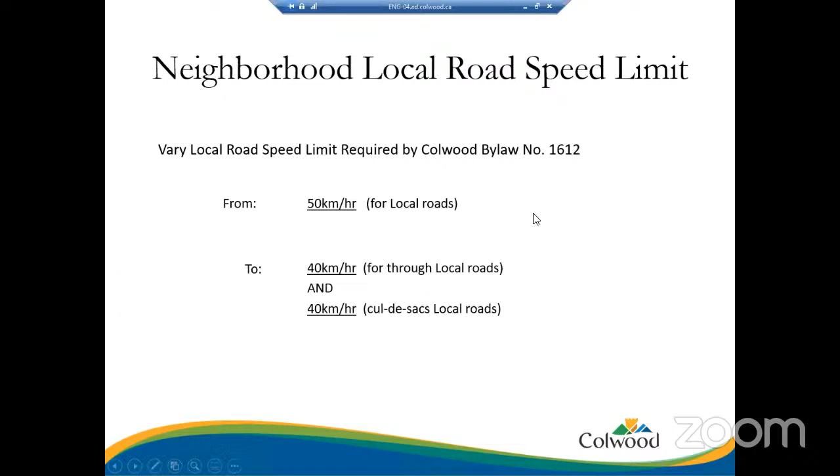In conclusion, the proposed road designs largely meet the intent of Colwood's Transportation Master Plan, as well as the Official Community Plan. They provide safer separated sidewalks, multi-use pathways, improved pedestrian and cycling connectivity, provide mode choices for transportation, as well as a transit-friendly road network. The new standards would be specific to Royal Beach lands and would be added to the current bylaw as an appendix or schedule. The applicant's proposal follows the intent of bylaw 285 as well as the TMP and OCP. Therefore, staff is recommending committee and council's consideration for these proposed road design standards.

In closing, I just have here the options and alternatives that were presented in the report, and I will leave this screen up for discussion or any questions. That concludes my presentation. Thank you very much.

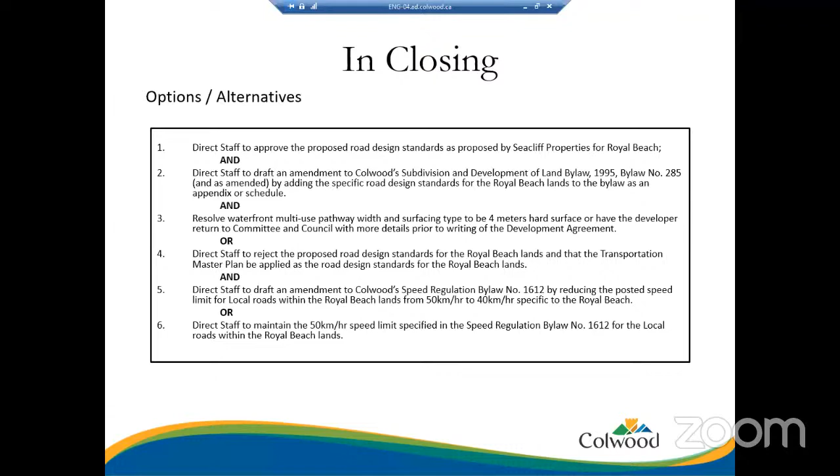Thank you. Thank you, Aaron. I have 3 hands up at present. Councillor Jansen, you want to lead us off?

I wasn't ready for that. Thank you, Mr. Chair.

That largely answered many of my questions, and I appreciate the detail. I am in favor of the wider multi-use path, especially if we're going to talk about rollerblading and ease of accessibility for all ages and abilities. I think it'll be a wonderful addition to the property. How far that extends, whether it goes property line to property line or just certain high traffic sections, I'm open to some discussion on that. Largely my questions have been answered.

Thank you, Mr. Chair. Thank you, Councillor Jansen. Mayor Martin. Thank you, Chair.

I'm actually very, very excited that this is an exciting time for us as a city as we start to see the potential of this property and how this is going to function for our residents. I'm really looking forward to moving this forward. Supporting what Councillor Jansen said, I'm very much supportive of the 4-meter wide multi-use pathway, and I'm also very supportive of it being hard surfaced. So I will be supporting both of those this evening.

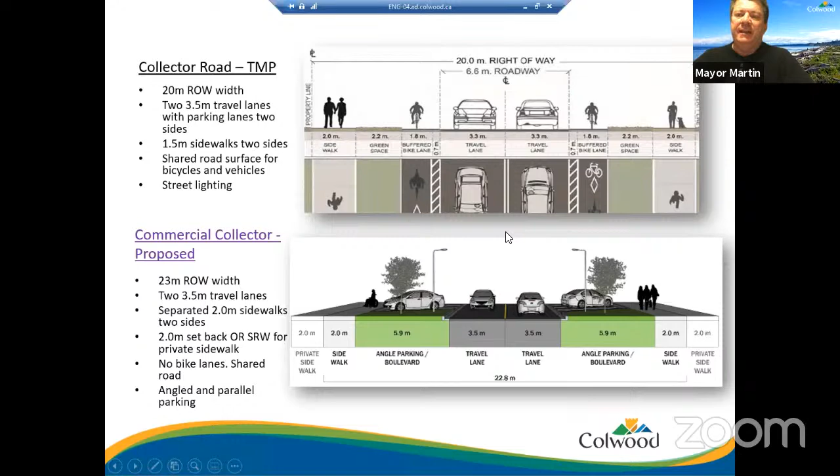Thank you. Along the same lines, if you were to be leaving the Royal Beach properties by bicycle, would there be an option in regards to the terrain? Would there be an option for people riding their bike to zigzag so they're not having to climb a steep hill? Is the pathway designed in such a way? I couldn't tell from a topography standpoint if we're actually accomplishing that.

Through the chair, Brent speaking here. Some of the details we do know are the grades that the design is considering for that main arterial road, the Latoria extension. There hasn't been a lot of zigzagging proposed. It's more a meandering trail up the drainage route. I think the most circuitous, zigzaggy route would ultimately be traveling further south to the edge, but we do think there'll be a grade component there. You are very correct though.

I'm sorry for the pause there, but you're correct—we haven't physically designed in, let's say, a circuitous zigzaggy route up, but we can work on some of those details on the environmental trail beside the drainage course to see if there's opportunity for that. That would be forthcoming in future design elements as we further flesh it out.

Excellent, thank you. And then my final question, for my own information—I don't have a lot of personal experience with private sidewalks and how they interact with the city. I understand that would allow them to put a canopy or something off their property building, and it would still be within that. I'm thinking more from a conceptual standpoint: are there cities you can point to that also utilize the private sidewalk modality you guys are talking about?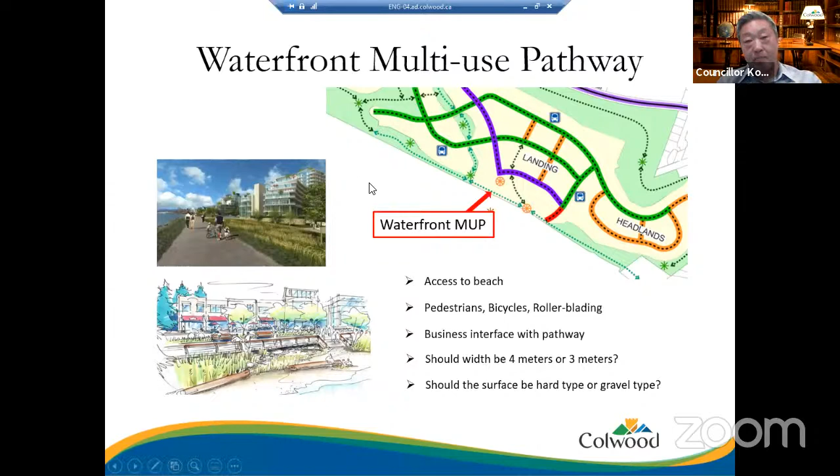I do have one question, kind of a goofy one, about our road standards. We have on-street parallel parking, and we have these scallops out in the street. Is that just for aesthetics, or is there a safety requirement? Don't we lose a lot of parking because of that? I'm not here to change the standard, just asking why we do it. Is it just aesthetics? Maybe staff, through the chair, could answer that.

No problem, Councillor Kobayashi. Through the chair, the bulb-out perspective was first implemented in the area called Royal Bay Northlands, where at the time of zoning consideration, the standard for street trees, bump-outs, and beautification was brought forward. We've taken that into consideration at intersection nodes as areas to improve the greening of the street, so to speak.

They do provide a minor safety advantage at intersections, bringing the pedestrian closer to the travel surface so they have higher visibility to vehicular movement and aren't likely to be hidden behind cars. But you're also correct that they lose street parking — the distance to create one of those bump-outs and back in for a parking stall is about 70% of a parking stall. So we're really looking at a learned example from Royal Bay Northlands as to how we can apply it in better proximity to the roadways and elongate some of those parking scallops, recognizing we've got trees in other boulevard areas.

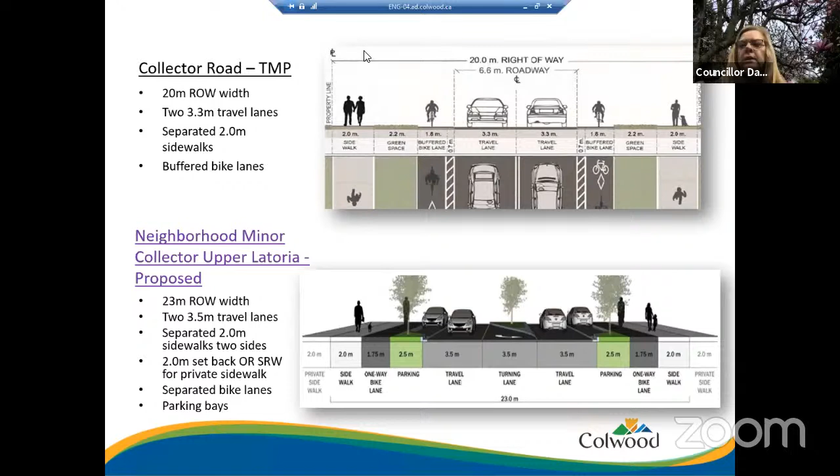I just want to suggest that sometimes it's really challenging to take these beautiful places where we live that have a great deal of height, say from Metchosin Road all the way down to the waterfront, and try to create accessible options. But I think there are ways to accomplish it. One is through dedicated accessible parking spots, because sometimes it's better to provide a transit stop or accessible parking bay that starts the wheelchair out at a more accessible level to the rest of the site. So that's something to consider when you run up against elevation changes that make it very difficult.

But the advice from the Disabilities Committee has been the wider the better and the smoother the better. It is possible to achieve a workable surface with crushed fines, which is permeable, but they're not nearly as resistant to erosion from rainwater, and they require much more maintenance, both in winter when there's bad weather and after it has passed. It's very hard to keep snow and ice from building up on more natural surfaces compared to a paved or hard surface path.

So I think there's probably a happy medium somewhere in the middle of it all. But there's also the consideration that cross slopes are really important for people who use mobility aids, whether it's a walker, a cane, or a wheelchair. Visually impaired people also benefit from places that highlight changing surfaces. So those are a few keys I could give you off the top of my head.

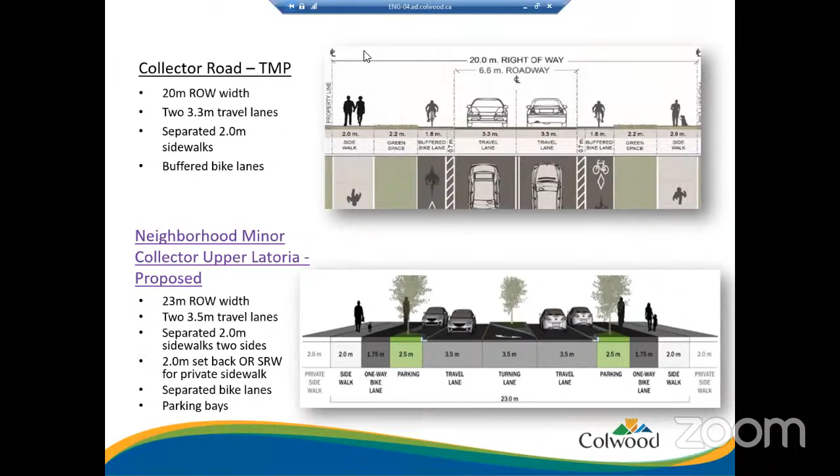Last year we started with a publication on our website about winter ice and snow removal duties, asking for help, and I think that's part of our proposal, but I'm certainly willing to receive any advice from council. Okay, I just thought we might have some ideas on particular equipment for maintenance of them, because I know we do have street sweepers contracted out for our roadways, some better than others, I guess, at doing those cycle lanes.

So my next and last question is on the multi-use pathway, because we know the foreshore area where the pathway would be located is actually leased from the federal government. So is there any issue with putting a hard surface on land that we don't actually own? It's not owned by the city and not owned by the developer.

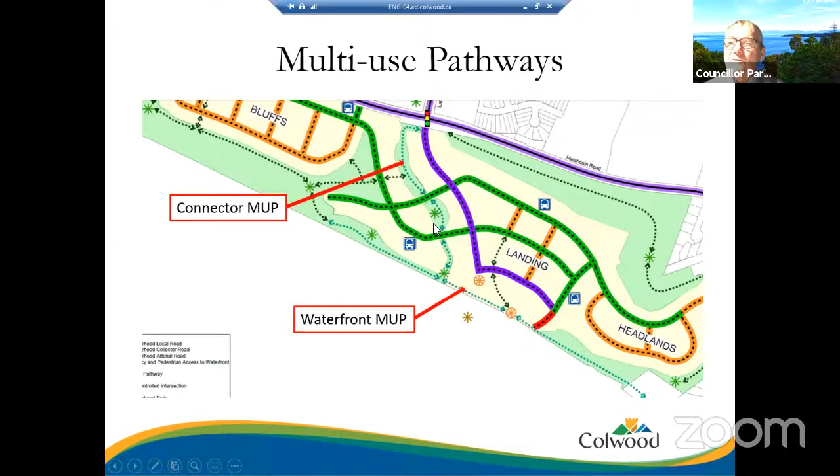I have a couple of questions I'd like to present to Nadine, if I may. That's about the volume of internal traffic, getting in and out of the site, and whether there are any likely issues with that. It also spills over into another concern of mine about the pedestrian crossing at Latoria and Metchosin. With 2,800 units, that could create a lot of traffic at certain times. Pedestrians may benefit from a grade-separated crossing there. Maybe they don't, I don't know if you've run those numbers or can comment on them.

Yes, I can comment on them. We have done a preliminary review of the internal traffic on the site at full build-out. I focused on the PM because when I compared the AM to PM, the numbers are actually fairly similar, a little bit lower. Usually in the morning we tend to get higher left turns, say, coming from Headlands and Bluffs as people try to go to work. But in this case, because there's quite a high amount of office and retail use, with people coming to the office or workers coming to open their stores, we see almost a balance, with the PM being a little bit higher. So that's the focus.

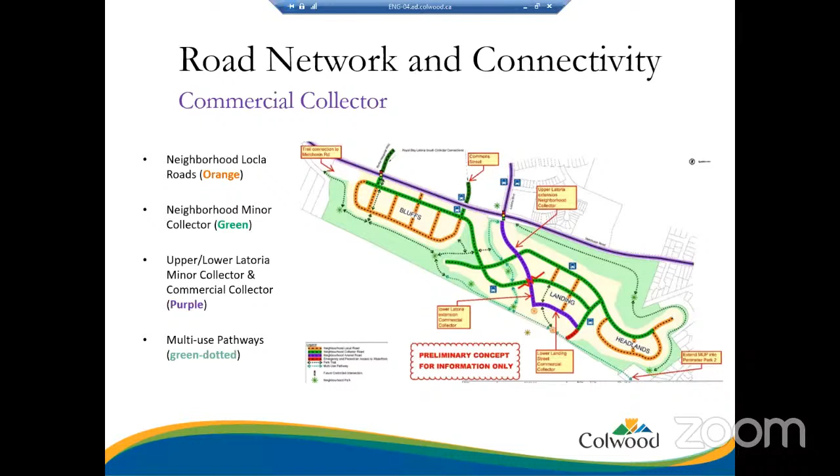I think we are providing them with multiple opportunities, whether that's at Ryder Hesjedal, Latoria Boulevard, or further south on Metchosin, with potential options to cross where the volume gets lower and lower as we go towards Metchosin. So that's kind of what I have. If there's more questions, I'm here.

Yeah, okay, no that's fine. If you think it's going to work, then I certainly defer to your expertise here, not mine. So tell us just one more thing.

There's been a lot of discussion on pathways and surfacing. Just for clarity, I'll throw my oar in the water—I guess I had pictured the 4-meter hard surfaced walkway from the landing right through to Ocean Boulevard. I'm not as keen on hard surfacing the other areas. I know some councillors looked at more hard surfacing and others less, so there's a discussion to be had there. I think it's fair that I put my point of view out there.

I guess I'm thinking I would expect over time that this is going to be a very popular commuter cycling route, and I think to hard surface it and get people down to Ocean Boulevard is going to be valuable. I recognize it does put quite an onus on council to extend that opportunity across Ocean Boulevard, which is a big ticket item that we're going to have to wrestle with, or future councils will have to wrestle with sometime. But that's where I'm thinking on that.

So it sounds like there's maybe some more discussion to be had on the multi-use pathways. Councillor Day, I see your hand is still up—did I cut you off, or did you just forget to lower it? I think, yeah, I didn't put it down. I thought you did, but that's okay. All right, consider it down.

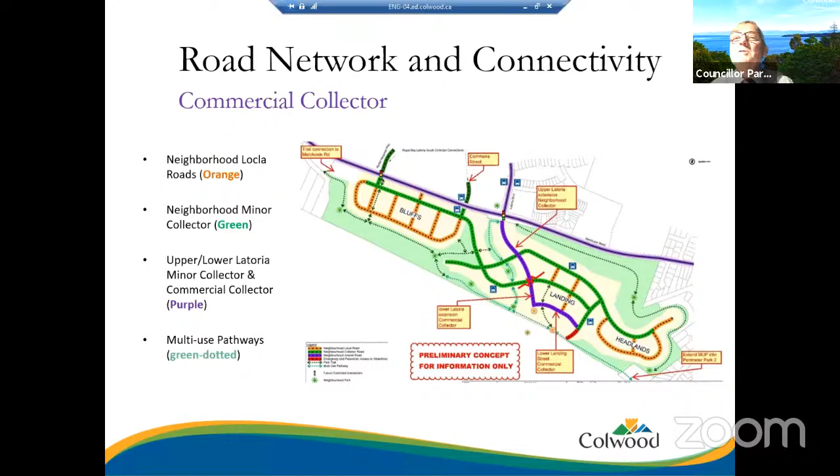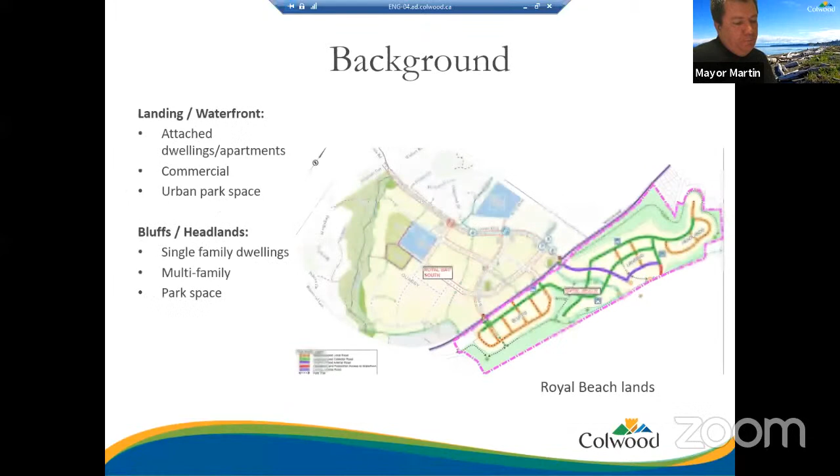Thank you, Chair. I will move the staff recommendation—I'm happy to read it out. I guess I will read it out: that we received the report, Royal Beach design standards, and the committee of the whole consider recommending to council that the road standards proposed in the October 19th staff report titled Royal Beach Design Standards be accepted, and that the Colwood subdivision and land development bylaw number 1995, bylaw number 285, be amended to add specific road standards as the appendix or schedule for Royal Beach lands, and that Colwood speed regulation bylaw number 1612 be amended to reduce the posted speed limits for local roads within Royal Beach lands from 50 kilometers to 40, and further that the waterfront multi-use pathway be 4 meters in width and shall be constructed with a hard surface.

The final design details shall be finalized with the development agreement. Thank you, I'll take that.

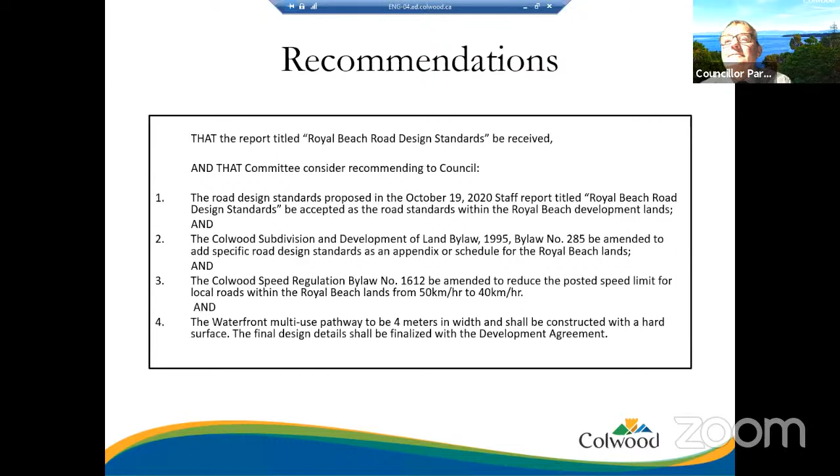I'm going to lower all hands and ask if there's any discussion on that motion. Seeing none, all those in opposition, please raise your hands. Seeing none, I'll declare that motion passed.

Next, we'll move on to 5.5, Royal Beach bylaw amendments, presentation by Dennis Carlson. Dennis, the floor is yours. Thank you, Mr. Chair.

Moving on to area 8, there were a number of concerns identified by council. Broadly, they were around whether the amount of area attributed to area 8 was sufficient to accommodate the proposed development, the ability to ensure adequate views of the public to the waterfront paired with public access to the waterfront, and also limiting the uses to ensure that the waterfront was animated.

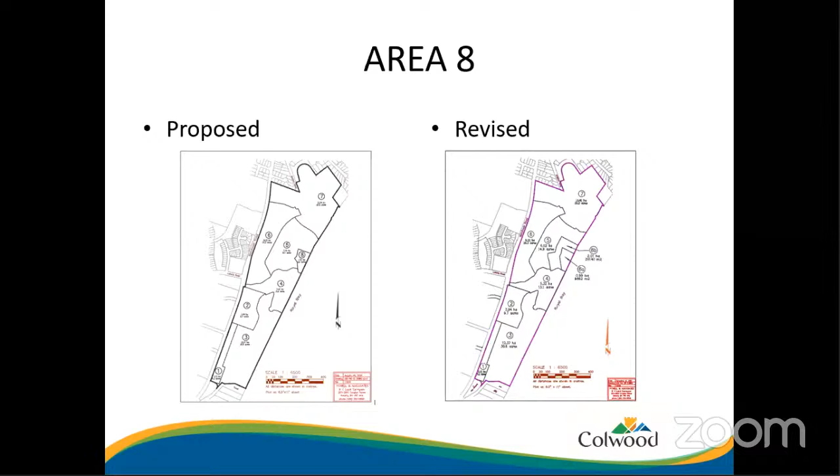In regards to Area 8A, the major zoning regulations will limit the uses and height adjacent to the waterfront, which reflects the sub-area plan. The height limit will be 9.5 meters, approximately 2 stories. There will also be a provision that no office uses are permitted within 18 meters of the waterfront property line, and uses on the ground floor will be limited to no more than 25% of the gross leasable area, with the exception of brewhouses and restaurants. For example, if the ground floor was 1,000 square feet with 4 units, each unit could be no more than 250 square feet.

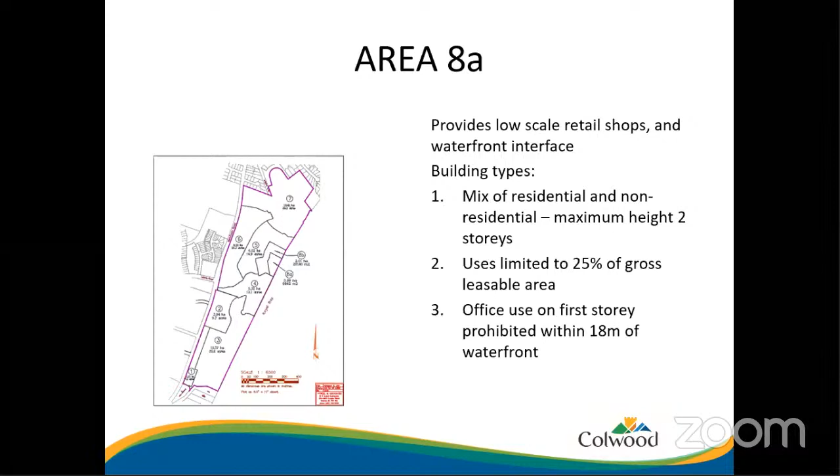The intention is not to create a finite number, because that number will always be wrong, but rather to impose a limit of 25%. Also, the zoning will have a provision that residential uses are limited to above the ground floor.

In Area 8B, the regulations limiting uses on the ground floor will be similar. The one major change, recognizing that you're moving away from the water, is to allow for more intensive development. So in this case, the height limit moves from approximately 2 stories up to 6 stories.

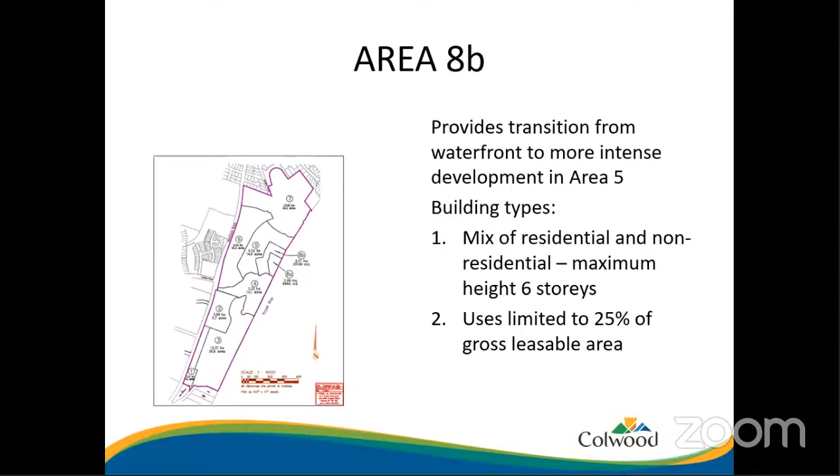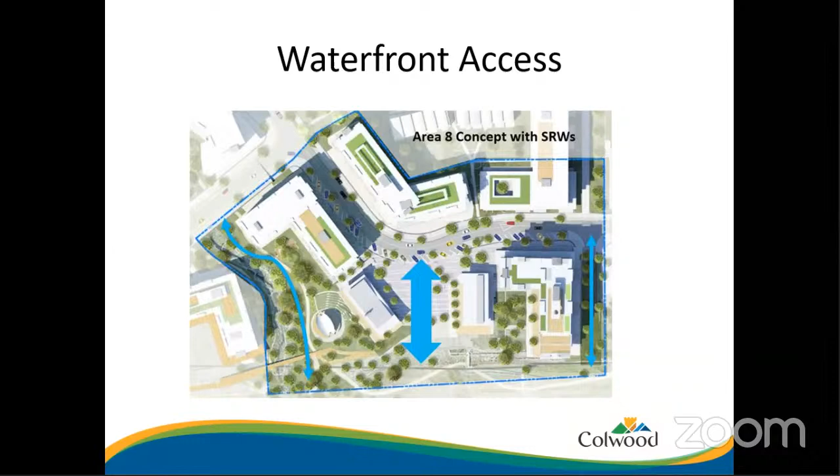The staff recommendation is that the amendments to the sub-area plan, appended as Appendix 1 of the staff report, be considered, and equally the amendments to the CD30 zone in Appendix 2 also be considered by committee. Should these move forward, they would be incorporated with previous amendments council has already considered, particularly limiting the maximum non-residential in areas 1 and 2, the Bluffs, to 6,600 square meters, and a provision to ensure a limited amount of commercial happens before the residential.

So specifically, a maximum of 250 dwellings in areas 4 and 5, which are the landing, unless a building permit has been issued for at least 3,716 square meters of non-residential. Thirdly, the height of apartments is decreased from 12 stories to 6 stories in area 4. And lastly, the height of non-residential has been increased from 6 stories to 12 stories in area 6.

So these provisions would all be incorporated into the draft zone that would be provided to council for consideration of an amended first and second reading. That concludes the staff presentation. Thank you, Councillor Baxter.